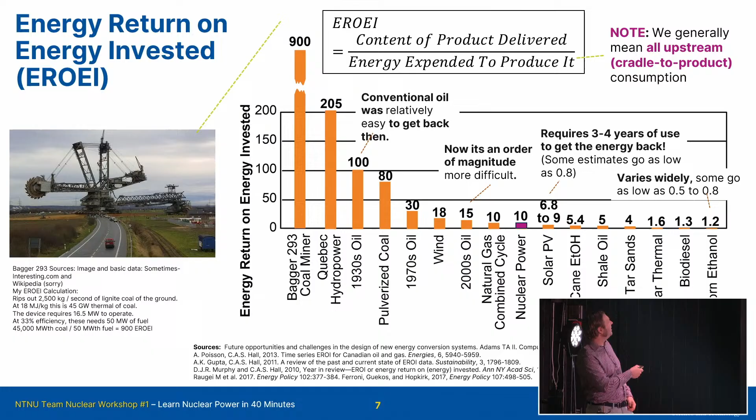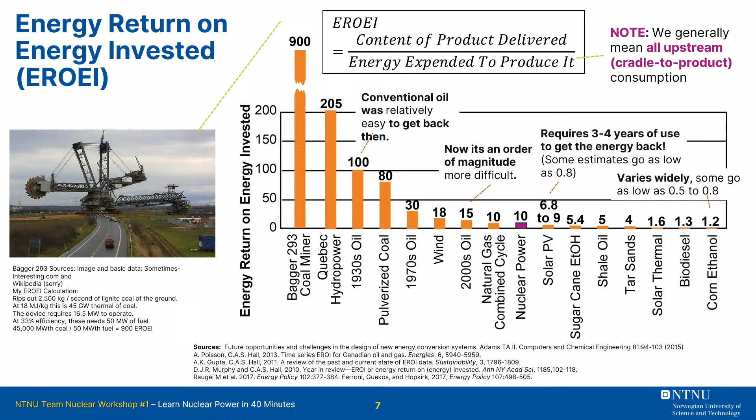The biggest thing I can find here is up at 900. This is the Bagger 293 coal miner. This is basically a giant behemoth machine that just rips the earth apart to get at the coal. It is basically the stuff of nightmares, but is an engineering marvel at the same time.

This 900 means approximately, as I can calculate, for every 1 ton of coal's worth of energy that you spend to run this thing, we can rip out enough to get 900 tons of coal out. That's what it means. And the bigger, the more efficient. That's where we have gone now.

The biggest I can find for hydroelectric is about 200 in Canada, in the province of Quebec. That means for every kilowatt hour of energy I spent to build and run the dams and everything, I can get 200 kilowatt hours of electricity back. That's why it's such a powerful and low cost and low environmental impact energy source, which we have throughout our country here in Norway.

Oil in the 1930s, so 100 years ago, it was 100. So for every barrel of oil I spent to drill and pump oil, you could get 100 out of the ground. That was back then when it was low-hanging fruit, it was easy to get. Modern coal mining is about 80, so this is with traditional mining that's modernized. Oil in the 1970s is about 30 because we've taken the low-hanging fruit. We're getting offshore now, we're getting farther down.

Wind is very good at 18. So you build that wind turbine and you leave it for years, you can get 18 times back. Modern oil is about 15. So we've gone from 100 to 15. That shows you how oil has become an order of magnitude more difficult to get. We're very far offshore, deep down in the ocean floor, for example.

Modern natural gas power is about 10, and nuclear power is about 10. So when it comes to actually making electricity, these are on some of the highest end of things that we deal with at scale. So that's where we put it in terms of nuclear power.

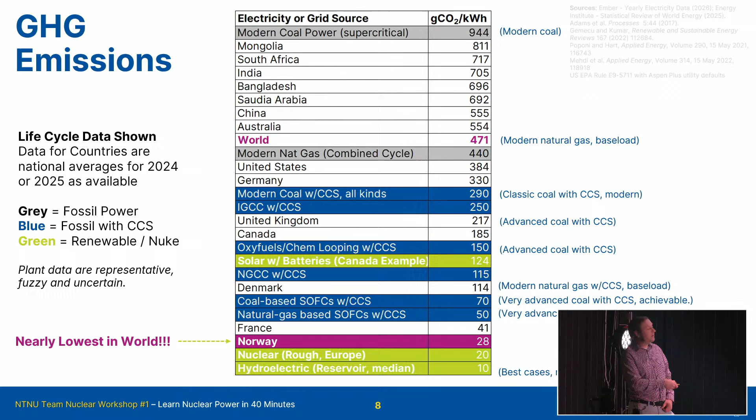All right, and so what that means is for Norway, if you are going to build more and you don't want more CO2 to raise your footprint, you can only choose from below your number on this list. Okay, there's not much choice here, right? And there's only so much you can expand hydro. Hence why nuclear is in the discussion. So now I think you understand why we care, right, for this country.

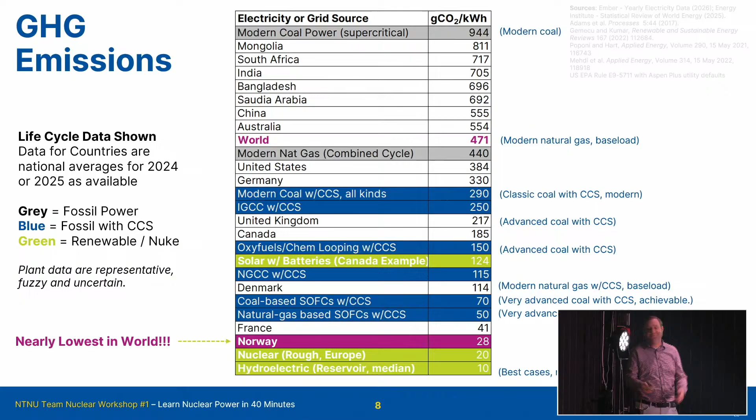Okay, so I'm going to talk about the science. I'll try to simplify it as much as I can because we're going to do it in about 15 minutes. We'll take some questions at the end of the first segment. So hopefully you remember the periodic table of elements. I'm a chemical engineer, so we deal with this a lot. But in the basic premise of nuclear energy, we care about uranium. There's other things, but we're going to really talk about uranium.

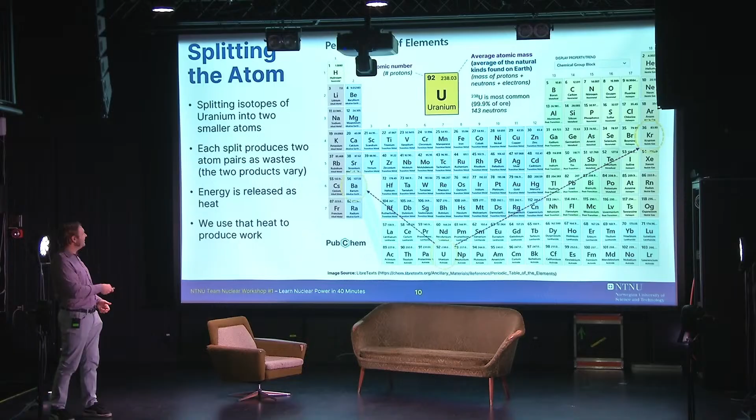All right, so that's the basic premise, and when you split it, it releases energy we capture as heat, and we use that heat to do work. That's a power plant. An engine, engineers, the name comes from building machines that take heat and turn it into work. Work is, you make that into electricity. So that's the basic premise. We're gonna take things that are big and make them into smaller chunks. The process of that is called fission.

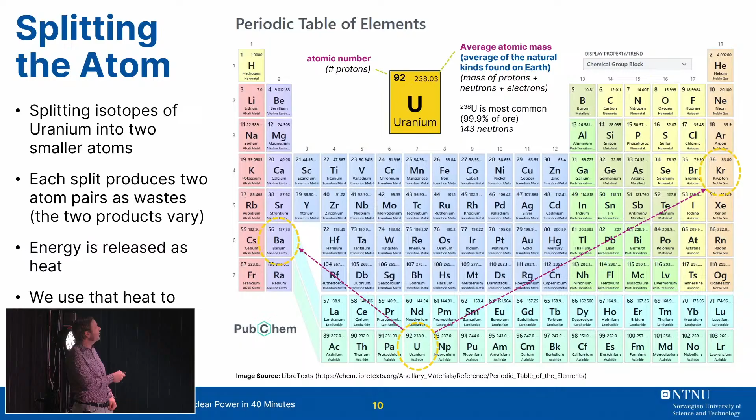All right, we're going to focus on uranium-235. So I had 238 here. We want that 0.1%. The 0.1% that we care about is 235. That's the stuff we can actually use and exploit for nuclear power. So it has 143 neutrons to go with it. And basically, the primary way we're going to do this is through neutron capture. The idea is that you have a neutron flying around, and it will be absorbed into this nucleus of the 235, and within a split second, it splits apart, with some probability distribution.

And basically, you're going to get your 2 other atomic cores. They're gonna split apart, but this is the part we like. 1, we get a bunch of energy we're going to use as heat. 2, we get more neutrons, so more pieces fly out, and that's useful. And then we're also going to get gamma radiation. Now that's the dangerous part, but we can also capture that and get some heat from that as well. So the whole premise here is that these parts are useful, the heat and these things.

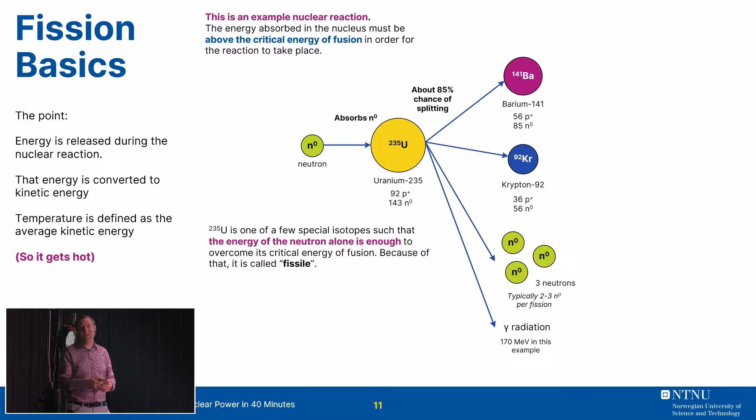So basically the reason why this is special, without getting into too much detail, in order for this to happen, there's an energy barrier you have to overcome. So whatever gets sucked in there has to have enough energy. But 235 is special because it's one of the very few isotopes or versions of uranium or other atoms where just getting one neutron is enough. And because of that, we use the word fissile to describe that material. So it's just very convenient, very useful. Most things are not useful for this purpose.

The first law of thermodynamics around mass balances is going to tell you that the mass before and the mass after the reaction has to be the same. So what we can think about is the number of protons I have before, which is 92, and the number of neutrons here, and the total is 144, has to be the same when I add it all up at the end. So they're just moving around, basically. It's a simple law, and that's how we hear about it here.

And the other factor is that we have more neutrons released. These can vary, 2 to 3, but more neutrons than what we put in. That lets us do a chain reaction. That's very, very useful as well. So we'll talk about that. So those are the key properties that we want.

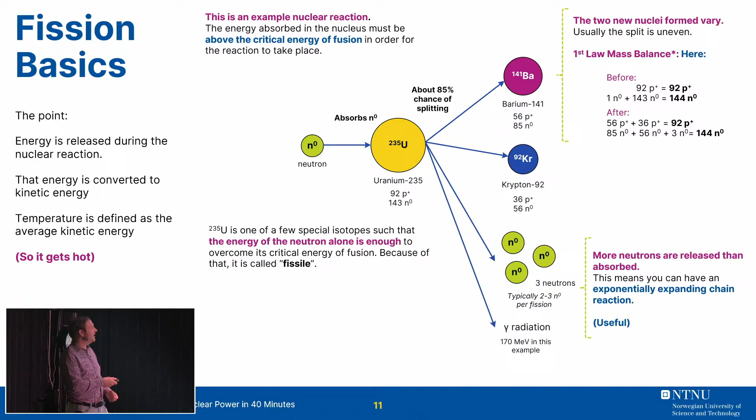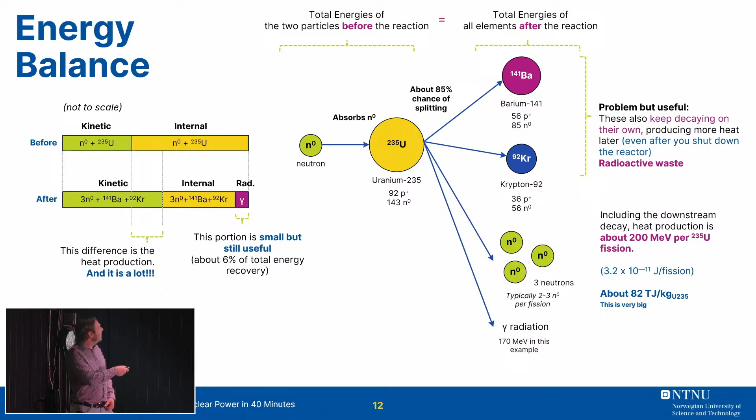Now, the first law of thermodynamics also says, just like mass before and mass after have to be the same, energy before and energy after have to be the same. So a similar way to look at it is the total energy, if I add them all up before, has to basically be the same as after. Over here, it's not to scale, it's just a cartoon, but before I had less kinetic energy, and my energy was mostly internal. Kinetic is like how fast it's moving and how hot it is.

That's basically kinetic energy. Internal has a lot of stuff, but there's potential energy stored in the interactions between the different atomic particles, like the proton and the neutron, for example. There's potential, it's a fuel. Because what I can do is convert that internal energy into kinetic energy, so my new products have a much higher kinetic energy, they're moving fast, and they're hot. It's the heat I care about. That difference is the heat I produce, and it's a lot. I also have some energy going to that gamma radiation, which is small, but we can actually recover that and use that as heat as well.

And in fact, this is so big that this is what makes nuclear power special. Now, one problem here is that these particles that we get, and there's a whole spectrum of them, usually keep decaying on their own, and they can have other reactions with neutrons as well. So this basically becomes what we call radioactive waste. This is the material that's left over that you've probably heard of. That keeps going.

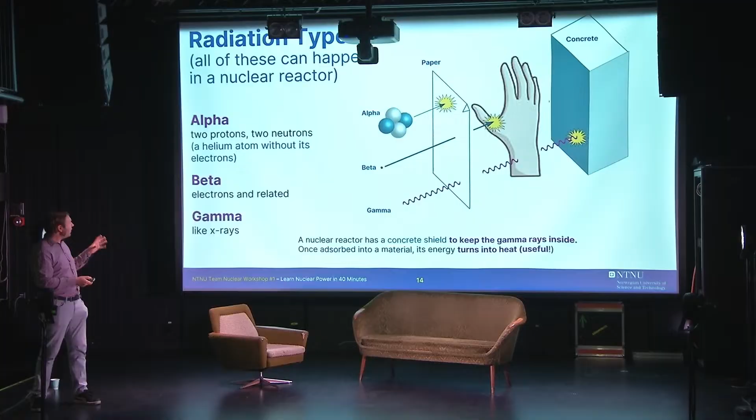Now, I mentioned gamma radiation. This is a big part of the science. Radiation. I don't need to go into all the details, but essentially all of these different types of radiation can happen in a nuclear reactor, and there's lots of things going on there. I talked about those other isotopes. There's really three kinds. Alpha is just 2 protons and 2 neutrons together. It's just a helium atom. Helium's inert, generally, without its electrons. This kind of radiation can't even go through a piece of paper, so we don't really care. It's not going to hurt us in any way.

Beta emissions are things like electrons, and again, I'm oversimplifying everything. That can go through paper, but it can be stopped by your hand. And gamma radiations are things like X-rays, so they can actually go through your body, but they're stopped by concrete. The frequency of this radiation varies depending on the kinds of reactions. The very first part of my career was in radio frequency safety around things like cell phones and microwaves. So depending on the frequency, the dosage and the parts of your body, some of these can be dangerous, depending on the amount.

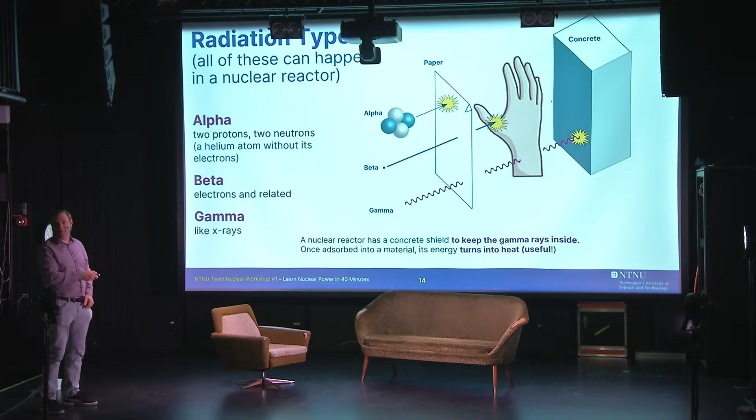In my first job, it was about protecting workers near microwave emitters. We know the science behind it. So this is why a nuclear reactor is shielded by concrete, because it doesn't go through the concrete. It keeps it inside. So let me talk about that chain reaction again.

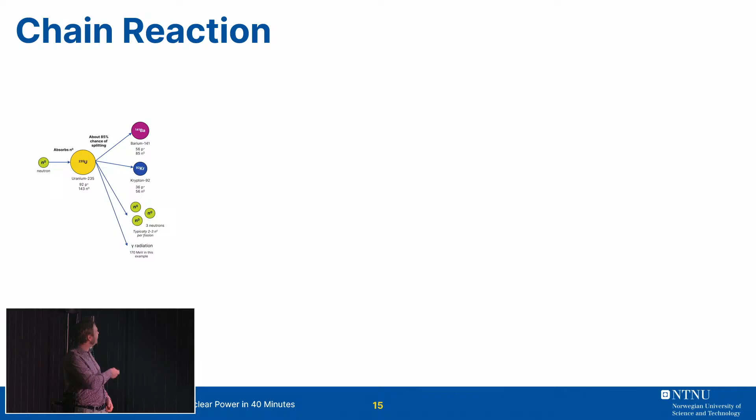This is the same diagram we had before. So you have that 1 neutron, and it might release 2 or 3 or more or less, but let's say 2 to 3. Now, once that's released, those 3 neutrons can then go on to interact with 3 more uraniums, right, quite quickly. And then that might release, now we have 9 neutrons flying around. Those can go on to interact with more. Maybe we're at 27 neutrons flying around.

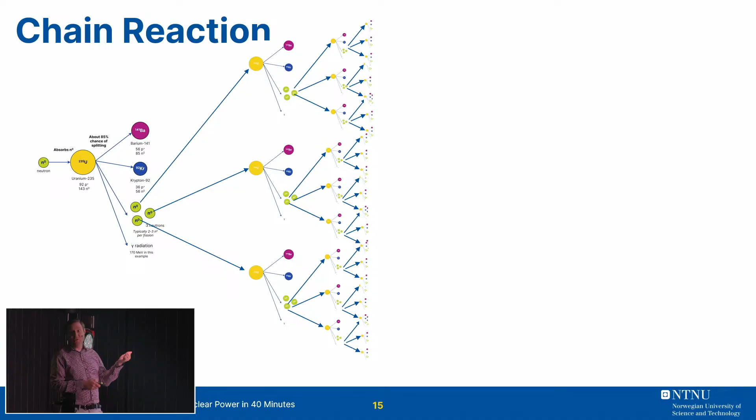Okay, and then now we have more and more and more. And if there's heat being released as we go, you can see this exponential growth, right? That's a chain reaction. This is kind of the extreme end of it. Okay, but it's a cartoon. That assumes every neutron immediately hits the uranium, which immediately splits and does all these things. And if you can achieve this, you get this.

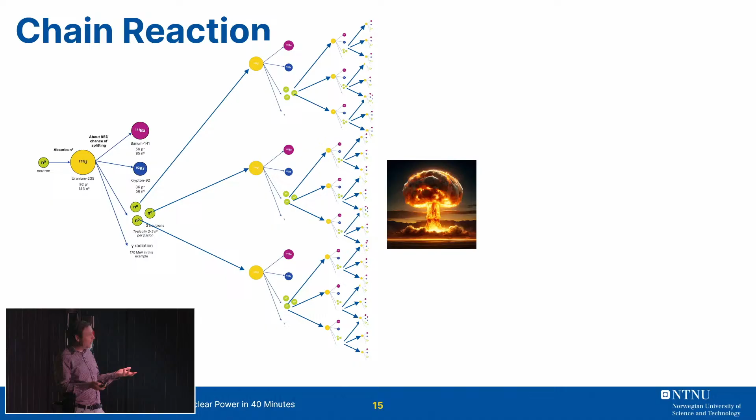Right, so a weapon would be doing this at very high volume and very, very quickly. That's not what we want. So it's useful, I'll explain in many, many ways. If it's uncontrolled, there's problems, okay? You can have runaways and things like that. But it's actually hard to achieve this because there's so many other factors, both by nature and by design, that kind of prevent this from happening, that work against us. There's anti-factors here that counterbalance.

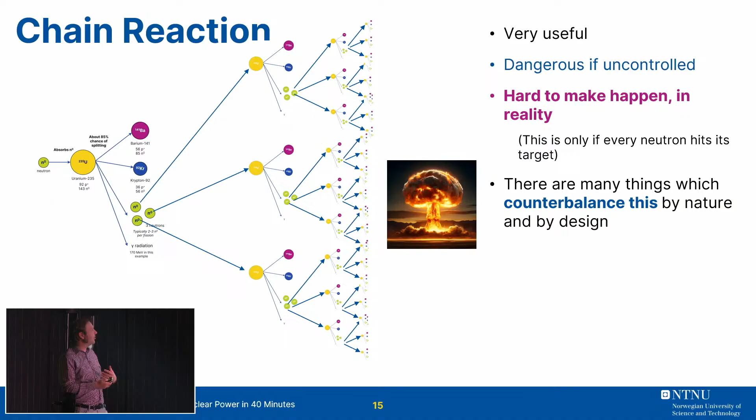So the science of it is, if we're going to try to harness this potential, we need to balance those factors. Now, one thing that happens is we have a flying neutron. If it is going to interact with the nucleus of our uranium, you can see this is very tiny and this is very, very tiny. So how do you have a very tiny, fast-moving thing hit a very tiny target, right? That can be difficult. So if it goes too fast, it can fly right by. It can hit it and bounce off if it's the wrong angle or the wrong energy, wrong speed, okay?

But the useful part is, actually, we don't have to hit this target exactly. If we want it to interact, if it goes slow enough, it'll actually be sort of captured. It goes to it. So there's all these different sort of energies and angles and things. It'll still go in, but you don't have to hit the target. The target is actually much bigger than this tiny little thing.

I'm losing audio in and out. Yeah, don't know what's going on there.

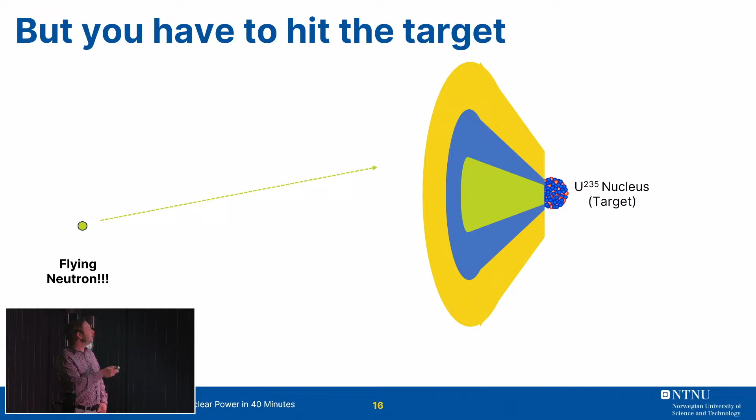Okay, so a lot of the design is to try to get these neutrons to hit the targets so they'll actually go in. All right, where's it going to go? So neutron capture is the idea that it's going to be sucked in and interact there. So the whole engineering now, which is part 2, is about how do you build the systems to make all these happen in the right way. Okay, I think that's the end of part 1 for the science part.

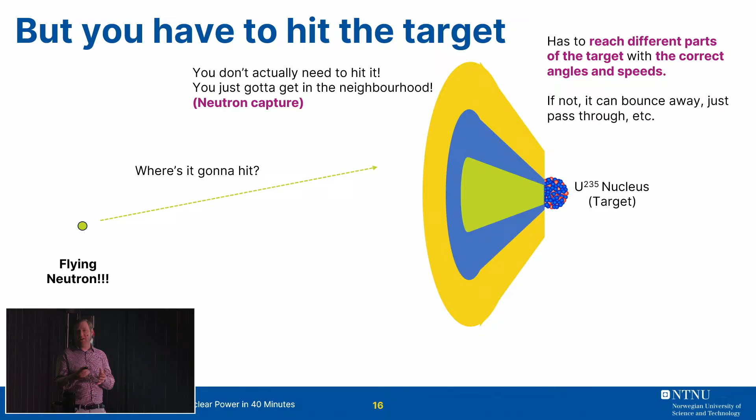I can't resist asking. When I teach thermodynamics to my students, I say that internal energy on a micro level is kinetic and potential energy. But in your slide you had kinetic energy and internal, that one. So what is kinetic energy here? That is different from what I tell my students, that it's atoms and molecules that have kinetic and potential energy.

There's all sorts of different forms of kinetic energy in terms of translational, which is movement, rotational, spins, things like that. The main thing I want as far as the science aspect of it for learning it in 40 minutes is the heat part. So temperature is another word for the average kinetic energy. So they're the same thing. And the point is, I'm going to get more of it.

I didn't fully hear the full question with the audio coming in and out. I'm trying to kind of categorize them very simply. Maybe you need to repeat what you were telling your students, because I didn't hear that with the audio. Can I try this one instead? Is this one working? I think so, yeah.

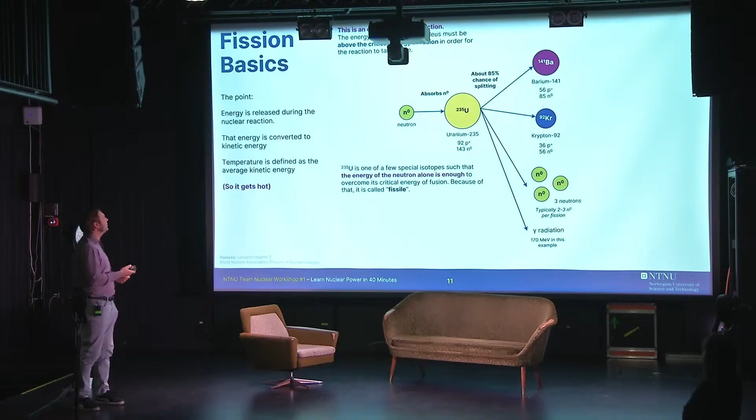I would like to go back to the slide where you show the capital costs, or the costs per energy. Oh, the energy return? Where you compare the different... Is it this one? No, perhaps the other one. This one. The greenhouse gas emissions. Sorry, it's the CO2. Yes.

When you come down to the different technologies, you have a mix of mature and not so mature technologies. Yes. I assume that these numbers are the current status of these technologies as of now. But what would you say can be the potential of some of these when these are mature and established, optimized technology? Yes. Okay, that is a fantastic question.

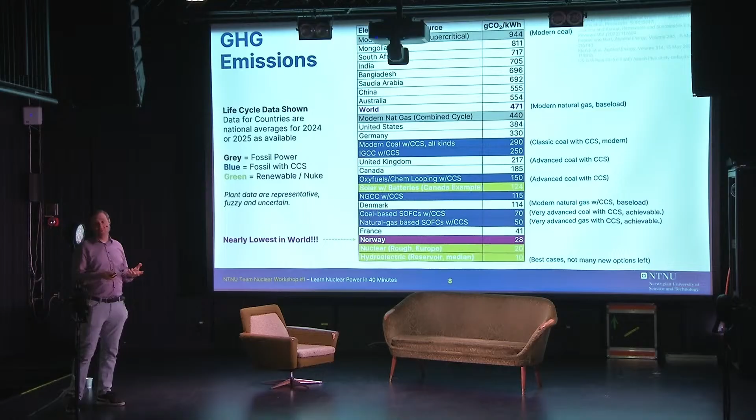And it's a fantastic question because I've done 10 years of research into figuring out those numbers. So the basic question is, where are we at in terms of maturity? So again, I said these are fuzzy. Each one of these numbers are the result of studies where we looked at literally hundreds of different published studies about each of these plants and where they could go in the future. In this case, every single blue one is basically the best I think they will go. So these are things which are not fully mature and not fully developed.

The modern coal CCS, this happens in Canada. We have these plants. There's some new ones going around the world. These other ones, for example, IGCC, 2 of these were built in the US, but they were both shut down and switched to natural gas because they were so terribly expensive to run that it was better just to not even do it after spending $10 billion to build them. These have never been fully commercialized at scale.

This is the best I think it will ever go, is 50. I don't think we can go much more than that. Maybe a little lower. This is in America. I think if we put this at a wellhead in Norway where they both produce the gas and capture the CO2 at the same spot, we might get this down to 45. So this is sort of the future we're heading.

Now, the green ones, I think this can come down. I don't have wind because honestly the wind literature is so all over the place I couldn't put a peg. I'd put wind like there. So that's not helpful, so I just don't have it. And nuclear, this is argued about, hydro's argued about, so these are very fuzzy. I hope that answered the question well enough, yeah.

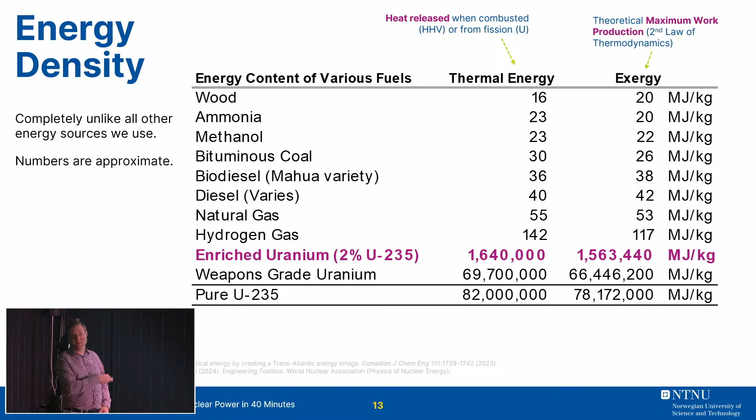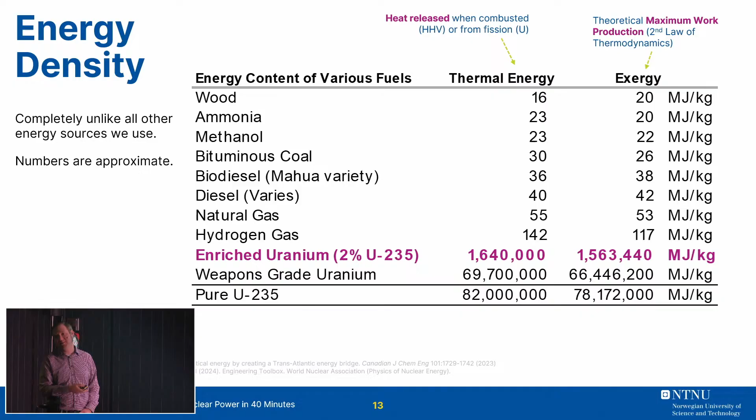Okay, so these are actually from our book, and these are actually the correct numbers, because if you include that additional energy that's not there in these tables, you can eke out a little bit more work in a very perfect environment, which we can't actually achieve. Yeah. Great.

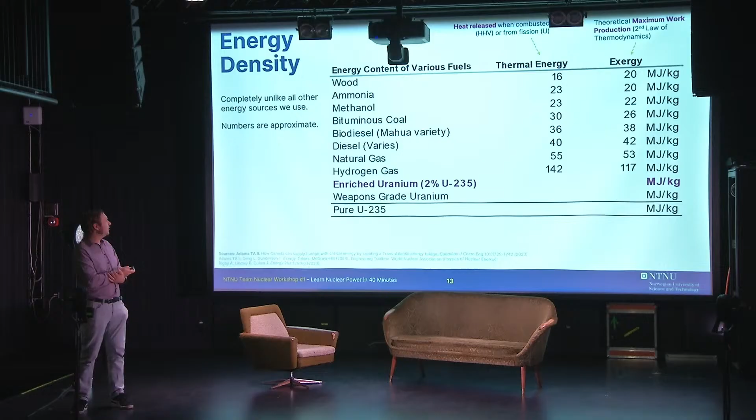It's very common in engineering contexts that you talk about public acceptance, but it's one of the challenges in the energy sector. So I'm putting this out there. I'm not saying you have the answer. I'm just putting this into the room as something to think about. Okay. To be honest, I didn't fully understand, because you're proposing that public acceptance should not be at the table. That was what I heard. Yeah, I would think you should put maybe public dignity or something else. It's not about acceptance. Public dignity.

Yeah, that could go in. I'm an engineer, so I do numbers and stuff. So when it comes to the feelings and emotions, I'm going to not claim any expertise. I think one of the things, to agree with what Ruth said, it suggests a one-way flow, right? That engineers are developing things so the public can accept, when it might go back and forth. So it's the name or the way it's presented that is the thing. Does that make sense? That makes a lot more sense.

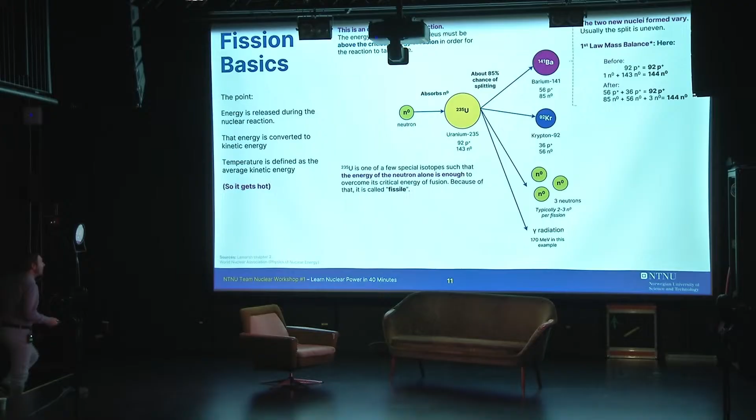Okay, so I'm going to talk a little bit about the engineering side of it now. And I think for time I'm going to have to shorten it a little bit. But the whole point of engineering is to apply the science. That's what an engineer is, an applied scientist. So how do we take all these theoretical principles and put them to use? Okay, so first I want to give an overview of the life cycle.

Okay, so what we start with here is uranium ore. So if we find uranium ore that a certain percentage of it, maybe 1%, maybe 0.5%, has the 235 component of it that we want, the rest being primarily 238. Okay, and that's rocks, that kind of thing, we mine it. That takes energy, and there's some greenhouse gas emissions associated, so think of like diesel and drilling and whatever's involved. And we have to get it somehow and convert it to a form that we can use in our power plant. Without getting into too much detail, I think we're going to skip the fuel production part, but we need to do what's called enrichment in most cases.

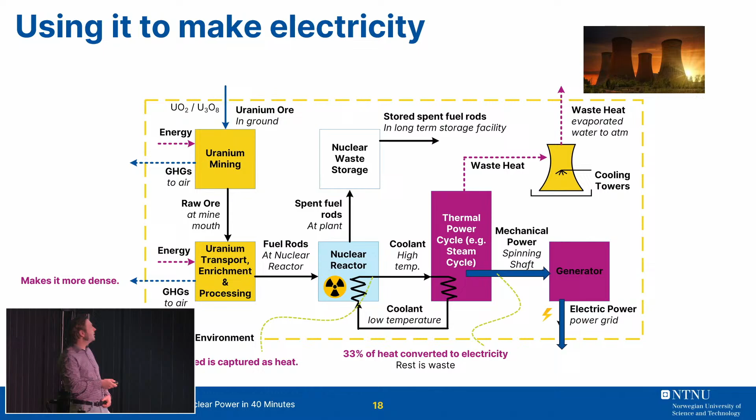Once we have that heat, we need to get it to our power plant. So we use a coolant. A coolant is a thing that goes into the reactor, and it gets hotter or takes thermal energy in other ways, like, for example, boiling water to make steam, and then that is carried over to our power system, and that's the engine. And then once the heat goes off, this is cooled again, and we send it back. So this is just a loop.

And this is overly simplified because you could have loops upon loops and things like that, but the general premise is I take heat away and put it in my power plant. We're going to use a steam cycle or some kind of power cycle to produce mechanical power by spinning a turbine, and that's attached to a generator, and that produces our power for the grid. And this part is very much like any thermal power plant.

So if I combust gas or combust coal, especially in the traditional sense, this is kind of the same. It's the same principles. The details are different, but once I have the heat, it doesn't really matter if it came from a reactor or combusting coal or natural gas or something.

Now, the problem is if I trace the energy, so the energy supply started here, okay? We're losing little bits as we go, or spending it as we go. I'm going to transfer the energy, we're changing form. Once I get to here, only 1/3 of that heat will actually be converted to electric power. So it means the plant is about 33% efficient. Again, overly generalizing, but it's not 50 and not 10, okay?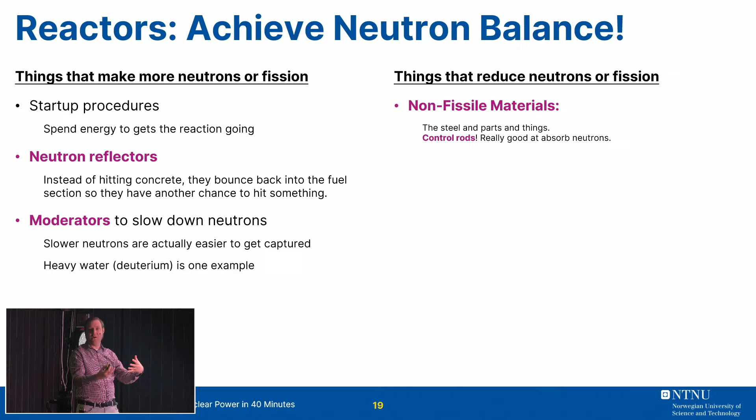But on the other hand, there's things that we can do to reduce the number of fissions so it doesn't go too high. One thing is you can just have simple non-fissile materials, things that will absorb a neutron without causing actual nuclear reactions. If they hit it and it won't cause a reaction, then you'll lose that neutron to that thing. So that counterbalances it. And in fact, we use that in something called a control rod. These are materials that can absorb the neutron without causing further reactions.

And basically, if you need to reduce the neutrons, you push them down more, and then there's just more to absorb. And if you don't have enough, you can pull them out. So that's the main control thing. There's computers that are constantly monitoring and they're going up and down all the time, every second. You want to maintain the right amount, so that gives us precise control. Very useful. So we do that in a sort of negative feedback.

The more negative feedback we can put in, the less reaction we have. One thing we do by design is, again, we have dilute fuels. We're not using pure uranium. We're using this dilution, and so you have other things in there that are not going to be producing a net surplus of neutrons by design. Okay, you can have a poison.

So scram is the term for emergency. You have a button called scram and you hit it and it would dump boric acid. There's a whole bunch of things that would dump into the reactor and they just absorb the neutrons, so they prevent them from reacting with further uranium. So it's an emergency shutdown apparatus, and things like that. And I already mentioned the thing about the things.

So the whole point of a reactor is to carefully balance all of these factors so that you have steady state. In chemical engineering, in my world, steady state is the rate is constant. It's not going up and down all the time. You can design them where you can do that, but for the most part, right now we're going to think about steady state only. And we want to do that while getting heat constantly and producing electric power constantly. That's the point. So the engineering tries to maintain that.

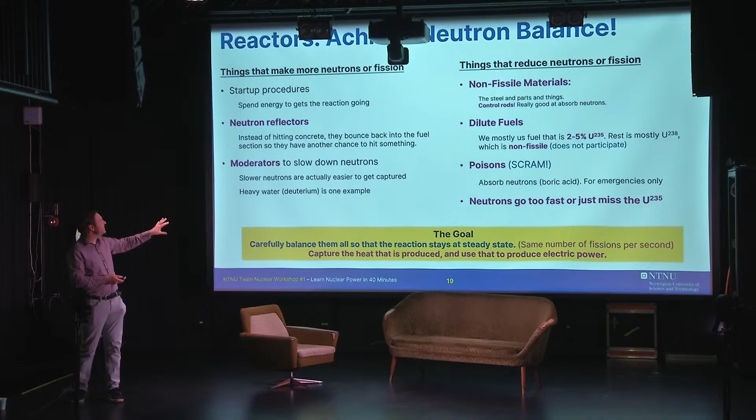There's many different kinds of reactors. This is a simple example, I think, to explain how it works. This would be a large containment core. These are things like steam generators. You can see some offices over here for scale in this particular example. And this little red one here is like a reactor unit inside this big zone. This is a very simple cartoon.

Coming into this, we have our coolant. This is going to come back from our cooling system, the cooling towers. So this is the cold stuff we put in. It could be quite warm actually, but we call this the cold side. It's going to flow in here; it's a fluid. There's different ones you can use: water, deuterium, helium, there's all sorts of things you can try.

When it goes in, we have our fuel section, that's the yellow, so that's where the nuclear reactions are taking place. Those are fuel rods, and that's where the reaction's happening. That's producing the heat. We have a moderator. Those are the things that will not capture the neutrons, but slow them down to the right speeds to maximize the chance of them being captured and keep reacting.

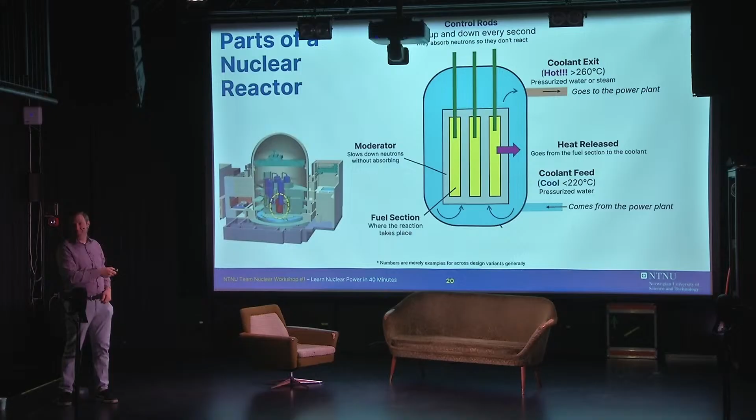We have our control rods, so these are going to go up and down. The more it's in, the less reaction we have, and we can pull it out, so they're just going up and down all the time. And then the point is, the heat that's released will go into our fluid. It could just be water in this case, and then it comes out hot. Usually this is pressurized water or steam, and we're going to have high temperature here. So that is the basic part of a reactor. These are going up and down to try to keep this as constant as possible.

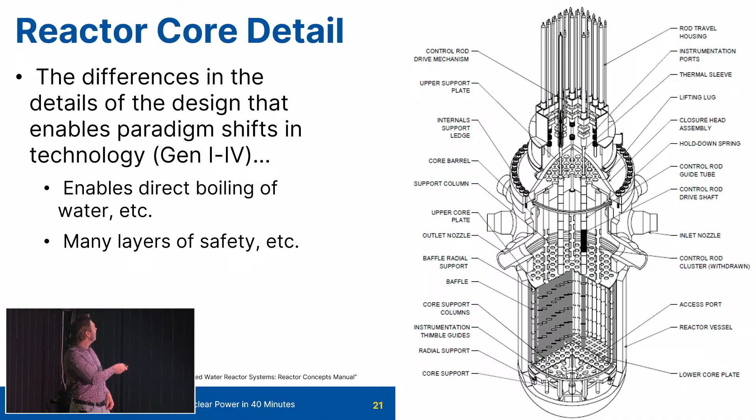I don't need to go over the design, but this would be like a real design of one. You can see there's lots of little rods here that are going to go up and down. You can see the inlet for the coolant, and it comes out one of these other sides, for example. It's going to flow around in there. We got the little holes that the rods can go up and down. We got fuel sections. That's what it really looks like. We don't need to worry about that today, but you can see the point. Lots of extra safety layers and things like that.

Once we get that heat, this is the entire field of engineering in one slide. Converting heat to power, I really didn't know how to do this in one slide, but we're going to give it a go. The basic premise is that for a steam cycle, you boil water, you push that steam over turbines to produce electricity, and then you have to send the water back as a liquid. So you have to condense it, and then you send it in the cycle. So we're going to start here, and we're just going to use a boiling water reactor concept, trying to be as simple as possible. That's your coolant in.

It's going to go at high pressure, and we want to heat it up to make it water vapor, so steam at high pressure. All right? This is a diagram that shows you the state of water without, I don't want to get into too many details. This is pressure. This is enthalpy, which you can think about how much thermal energy it is. There's multiple things in here. That dot is atmospheric temperature and pressure. That's 1 bar and 25 Celsius. The hotter it is, it goes to the right.

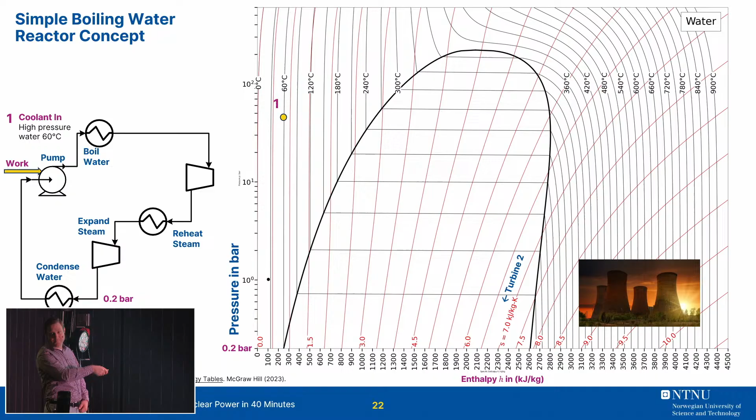This is the phase line. So this is a liquid. So it's liquid water, room temperature, pressure. If I add more heat, it gets hotter and hotter. That's 100 Celsius. Then it starts to boil. I get the first bubbles of vapor. Boils more, boils more, boils more. When I get all the way out here, now it's all steam. And then if I keep heating it, it gets hotter and hotter. All these black lines are more and more temperature. It just gets hotter and hotter.

All right, we're going to start up here. In this case, I've drawn it at 60 Celsius and much higher pressure. What is that? 10, 20, 30, 40, 45 or so bar atmospheres. And so what I'm going to do is I'm going to heat it up. There's a whole system here, but I'm going to ultimately use the heat from that reactor to basically get it to 2, and that's what's going to come out of the reactor now. That's the coolant exit. So I want to have a high pressure, high temperature steam.

And this can actually be a little bit more to the right. It's a cartoon because it's so variant. But there we go. I'm going to come out high pressure, high temperature, and I'm going to send this to a turbine. And that's going to produce my shaft work. These red lines are something called entropy lines. Basically, the best turbines you can ever make will follow a red line. So the most efficient, it follows that red line perfectly.

So if I have a turbine, what I can do is I can reduce its pressure while producing work and following approximately the red line. So I'm going to go down a little bit. The width there between 2A and 2, that energy is the amount of work I produce in the turbine. So I want to go as far to the left as I can if it's a good turbine. It doesn't go very far. I'm going to add some more heat and move it here. And then I'm going to send it through another stage of turbine and go down again, so I produce more work in that width. It's quite a lot. And that sum is what I actually produce.

And now I have a bunch of waste. I can't use it anymore. It's weak, low pressure, wet, not very warm, right? So I just need to get it back up to number 1 and send it back to that reactor again. So the rest of my process is to use condensers. That's our big cooling tower. And then I'm going to use a pump and send it back up. So a steam cycle is just going around this diagram, taking heat in, producing power, and then cooling it down so I can get it back into my pump and put it back up again. That's basic engineering, hundreds of years old. And that's how it works. These are attached to generators and you get power.

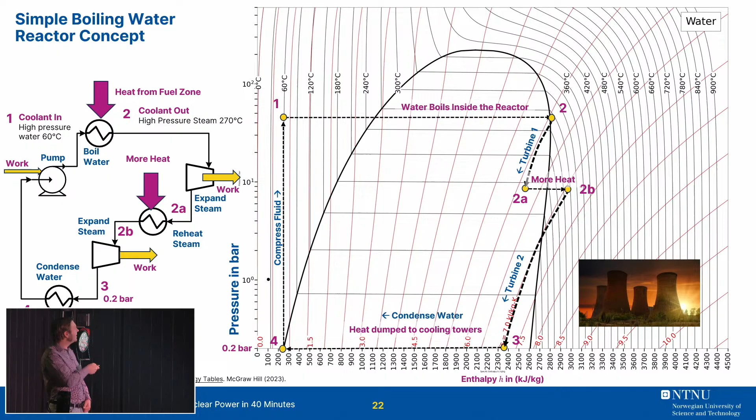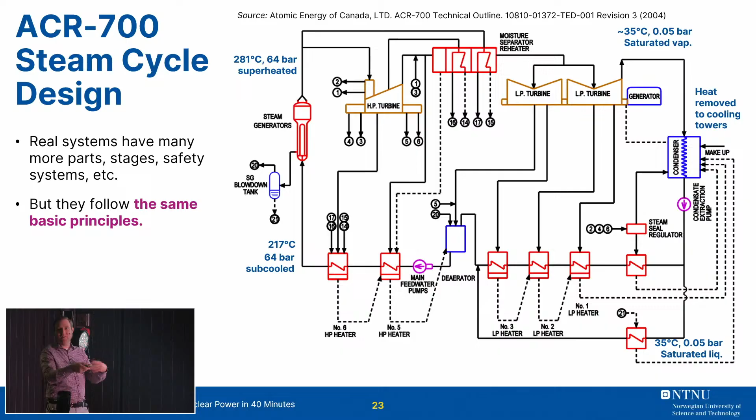This is an example of a real system in Canada for how we do it there. Okay, yes. This is the first stage of turbine. These are the second stages. All of these red boxes are ways of moving heat around. There's our generator that produces electricity, like you have the copper coils spinning, magnetic fields, that kind of stuff. There's our condenser that's connected to our cooling towers. We got some pumps. So it's the same thing, but just more complicated with lots of spaghetti of pipes everywhere.

So what I've hopefully showed you now is how we can go through and take the energy from the uranium out of the ground, refine it, enrich it, transport it, use it to convert it to heat, convert that heat to power, and convert the shaft work to electric power for electricity. And we get 1/3 of it, the other 2/3 lost to the environment, which is actually pretty normal for how these things work. Final slide.

Again, we talk about steady. Right? I picked a week in Ontario last year where they have a large amount of nuclear power. This is what I'm familiar with. This is a week last year in a very high demand, difficult week to produce electricity. What you're looking at is during a very hot part of the year. This is the total power produced in the province.

Okay, green is what's produced by wind. The yellow is solar. You can see it's not very much. Nuclear is this big, steady, doesn't change, constant for a week, the whole week. Right? I think I can see a pixel, maybe, change, right? Hydro they use to go up and down in Niagara Falls, okay? Produces a large amount of water, but they need natural gas to cover everything else that they don't have. Okay, this is a very high demand week. Sometimes this is often zero.

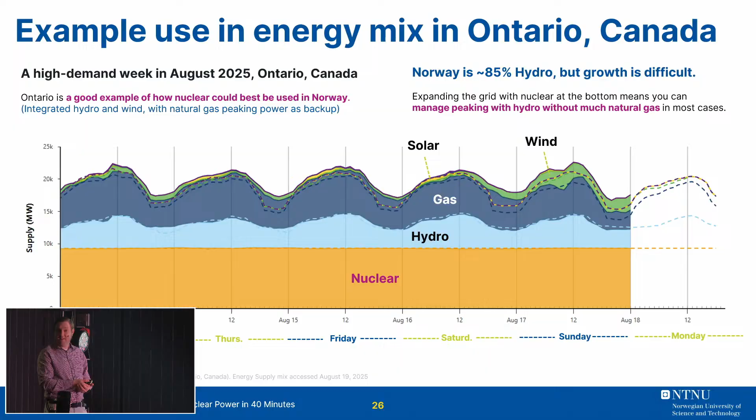In Norway, we do almost all of this with just hydro, the baseline and the peaking, up and down. So if we were to do this in Norway, it would probably look a lot like this, except that gas is all hydro. We would just have the hydro doing this part, but we can lift the base up and do a lot of the work with nuclear so that we can increase our power production but still maintain these peaks, like that. Okay, that's the end of engineering. Hopefully you're all ready to go design power plants and build them. All right.

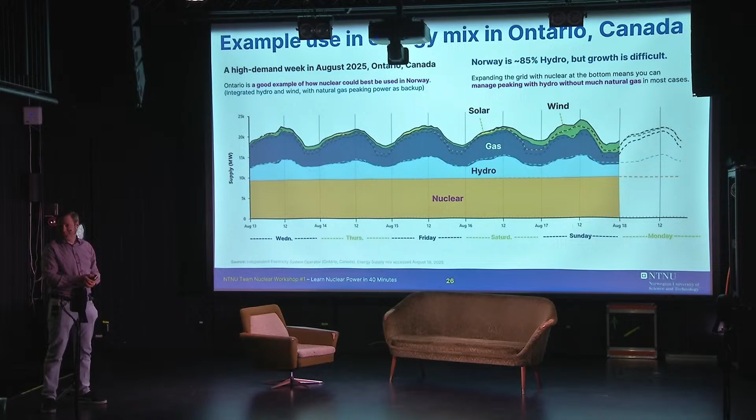Thank you, Tom. We could maybe have 1 or 2 questions before we move to the panel. I don't know if anyone has a question ready to go right now.

Yes, we have questions. Okay, so now you talked a lot about the traditional way to produce energy from nuclear fission, which is this steam cycle which has been used for many, many years, right? So I wonder whether there's been some research going on into some more sophisticated ways to harness the nuclear energy than just kind of the primitive way of transferring it to heat. Yeah, so that's a really good question. So you can take my nuclear course, with many of the instructors here, actually.

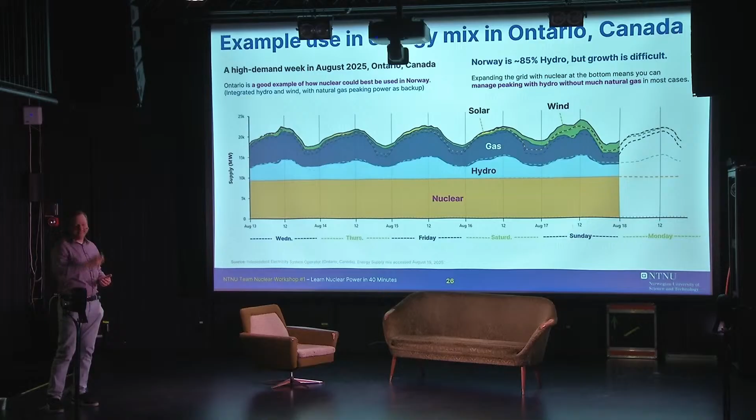So the technology I've shown you, the CANDU system, is from the 60s, 70s, 80s. You know, the reality is that the technologies have been advancing on paper for a very long time. We use something called generations. Okay, so the first generation was like the 1950s. This one is what we call generation 2 plus, or 2. In this case, it's a classic heat and steam cycle. Generation 3, those do exist mostly, or what's running. 3 plus is being built now, I'm sorry.

Those are basically more advanced versions of this where, for almost all of them, we have a steam cycle with just more efficient ways of doing things. So higher temperatures, higher pressure. So it's basically moving the points out more on that pressure-enthalpy diagram. But then we have generation 4. Generation 4 are things like molten salt coolants. We're not using water. Helium coolants, that's actually where I've done my research. Because you can get to very high temperatures, for example, with a helium coolant, 800 Celsius or more.

And then at that point, you don't even have a steam cycle. You go through gas turbines directly. Actually, you do take waste heat to make steam, but your first cycle is actually running gas through a turbine directly. And then you have fusion as well, so that's a completely different world, which I actually don't know a lot about, but that's all the theoretical side of things right now. I hope that answers the question without going too much into detail. Yeah, but I think on paper, there's so many great ideas. It's a matter of getting them out there. Yeah.

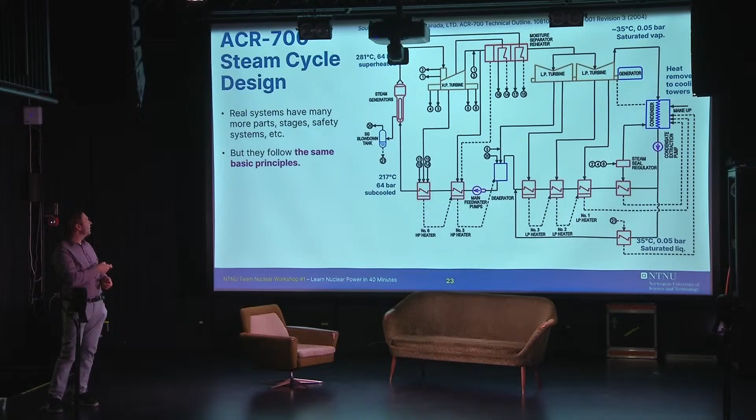Thank you, Truls. But it says the same on the flow sheet if you go to the next one. It says 64 bar, 281 Celsius. The saturation temperature at 64 bar is 280.9, so it's just 0.1 degree away. That's not really superheated. It is, okay. It's enough that you should not have droplets. But in nuclear power, now we're going to get into the details of that 33% efficiency, and what we could do to improve. And this is actually where these are improving.

In most power plants, what he's talking about is that these lines come into the phase envelope here. That point lands inside it. In a coal or natural gas power plant, they don't. We take it way far outside and take it down until they hit, go out again and take it down until they hit. The reason is that building this thing moving at 10,000 RPM to handle water droplets slamming against the side is very technically challenging and very expensive. Those power plants can operate at 500, 550 Celsius. We are, in generation 2 and 3 technology, at 260, 280, way lower.

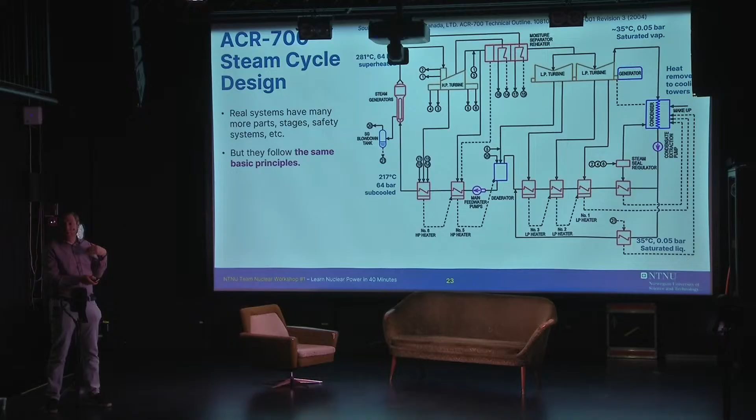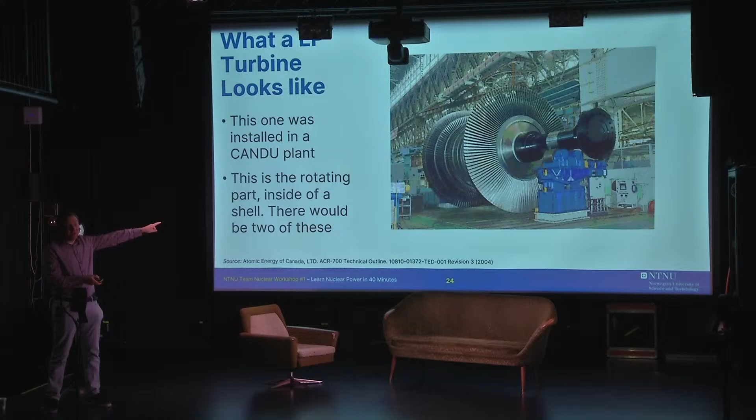Because of that, we actually spend the money to build ultra-resilient turbines that can handle up to 10% liquid moisture content. So the reality, Truls, is that in fact we go up to 10% of the way inside. And there's an economic trade-off for how much you can handle, all these optimization factors. It's because we're eking out every single bit of efficiency we can and spending capital, because it's actually less efficient to not go inside for a given temperature. So we voluntarily spend extra capital to eke out a tiny bit of efficiency with what is frankly a very low temperature reactor.

Generation 4, we want 800, 500. 3+, we're increasing this. So that's where we're headed, because that means we don't have to do what he's saying.